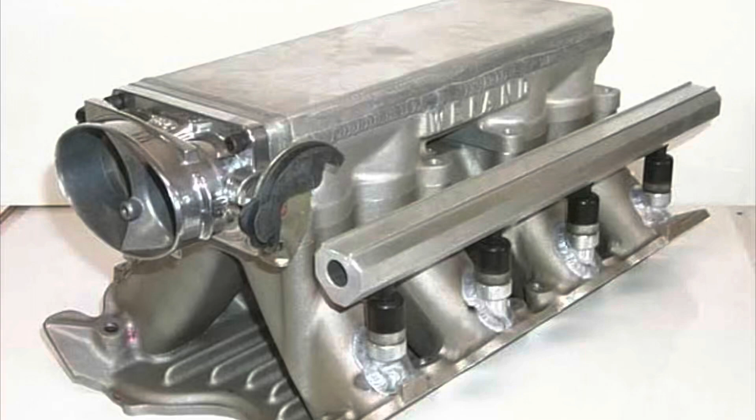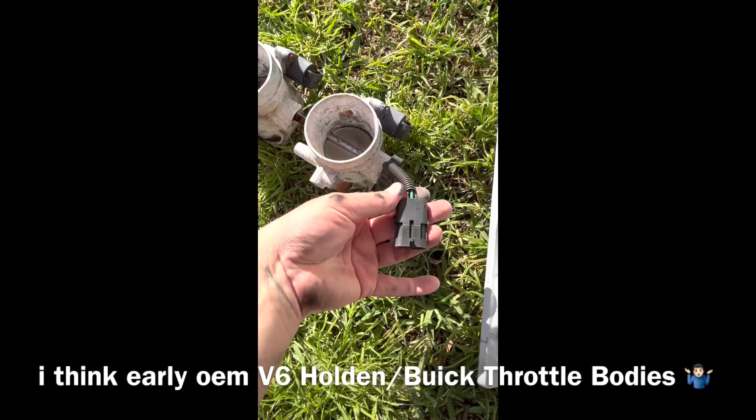Okay, throttle bodies are off and they seem to be welded there at the shaft, so they're interconnected that way, but they're just seized up. That's okay. And I think they're 65mm throttle bodies, and they got one TPS unit, throttle position sensor, right down one of them. That's all you need. This thing.

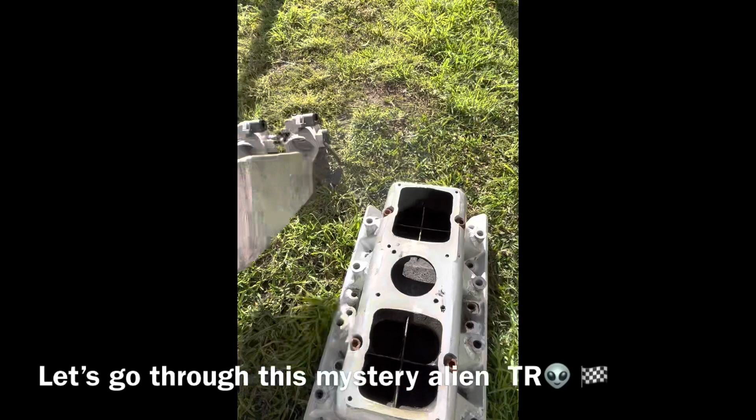Okay. The throttle bodies are now being soaked in fuel and oil. Not that I care about them, but you know, we'll just see if I can free them up. Okay, let's get this top off. A lot of silicone and that on there. All right, ladies and gentlemen, we're down to a twin carb tunnel ram now. All right, let's get this carb adapter off.

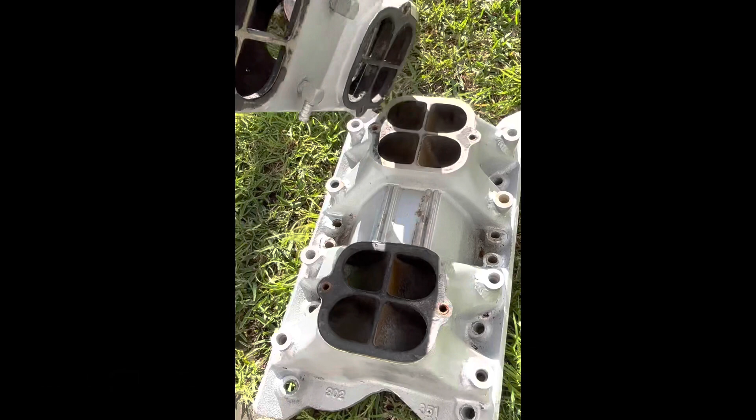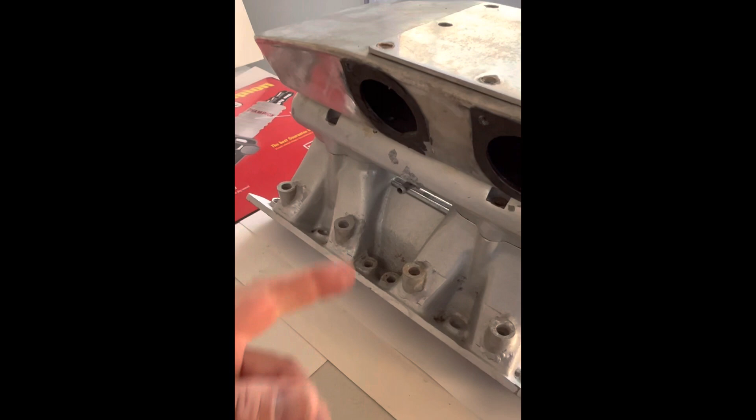All right, okay, let's go ahead and pull this thing down, and I'll give you the rundown and the story with it and what's to go with it. Yeah, anyway, the gentleman I bought this thing off for dirt cheap, I must add, has been involved with Clevelands in his past, both 2V and 4V. He's had some cool things.

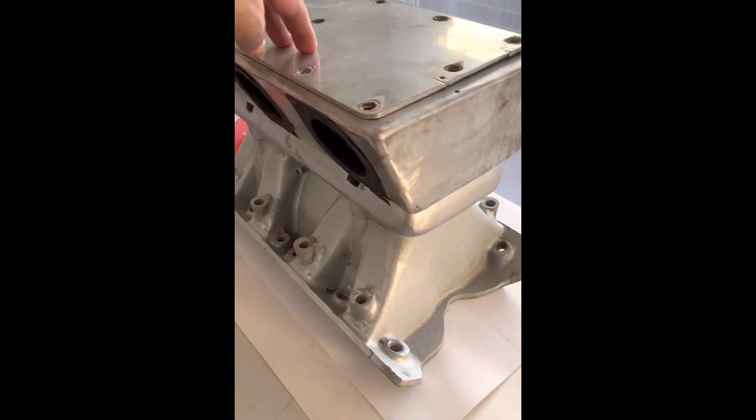And it was actually sitting out in his property, out in the field, and it was actually used as a marker for a mountain bike trail. So yeah, it was sitting out on a log for a while, and it must have toppled over and hit the ground and sat there for a while until he decided to flog some of his Cleveland stuff off and it ended up with me.

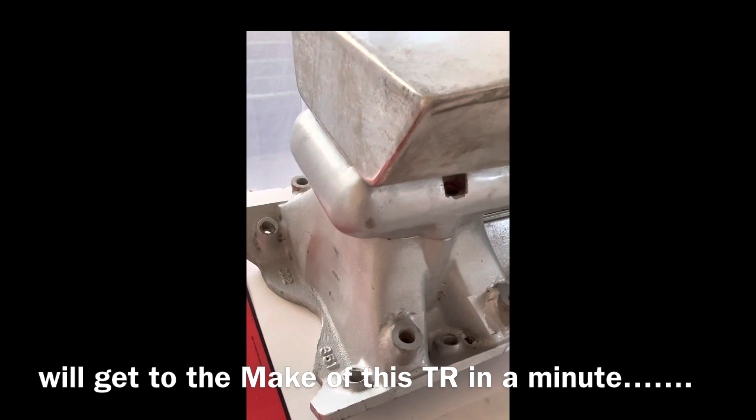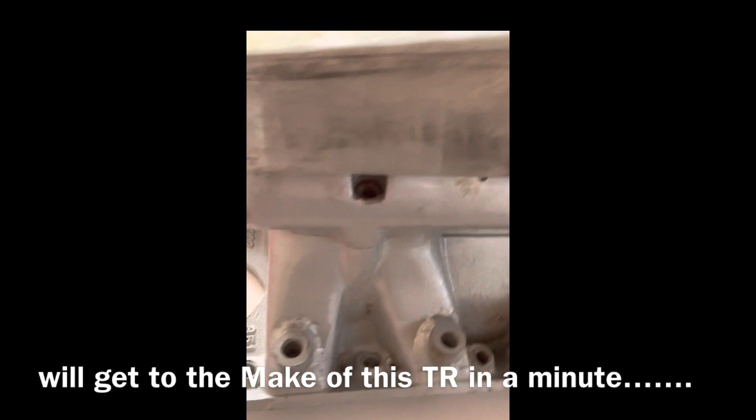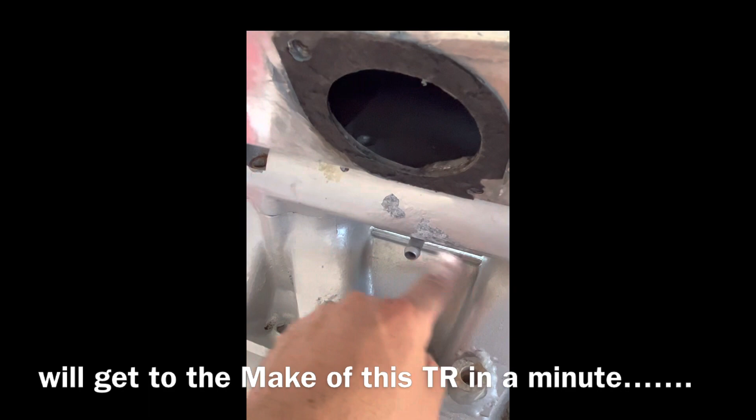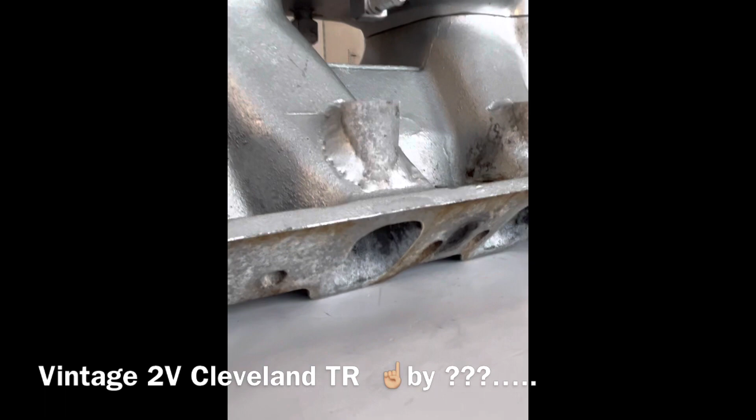Anyway, a couple of you guys guessed sort of what it is, and I'll just go ahead and explain that a little. So first, we've got to look at distinctive features, like that, 351, 302. We've got to look at things like this that's under there. See that finned cast in stripes there. We've got to look at things like that. And obviously the size of the intake ports and runners, and they're not 4V size. So we have a 2V intake manifold here, a 2V tunnel ram.

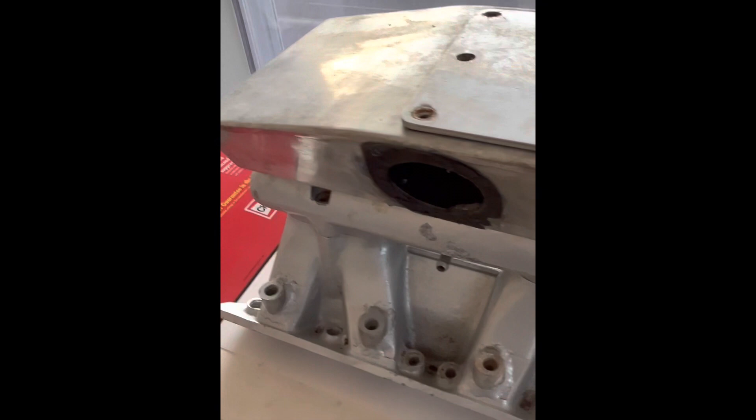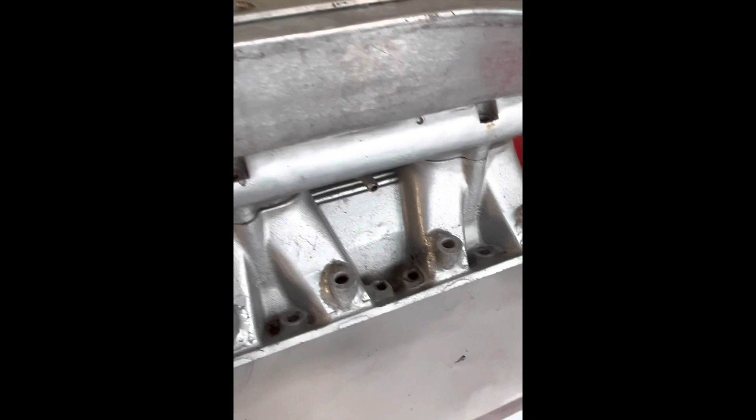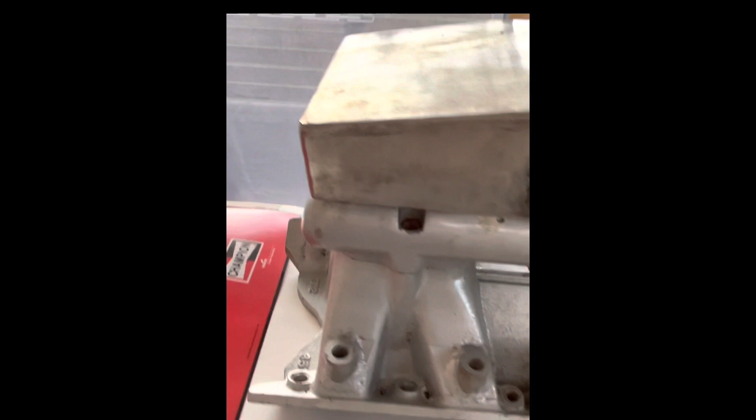It's definitely an interesting piece to look at. It's not the best quality made modifications as far as what I can see, but the guy did convert this over to EFI, and he even had the ECUs and all. So I don't think things were looked at and thought of well when it came to modifying this thing. I purely just wanted it more for the base, and possibly maybe the carb plenum, and that's about it. But yeah, it's interesting, and let's go through what he's done.

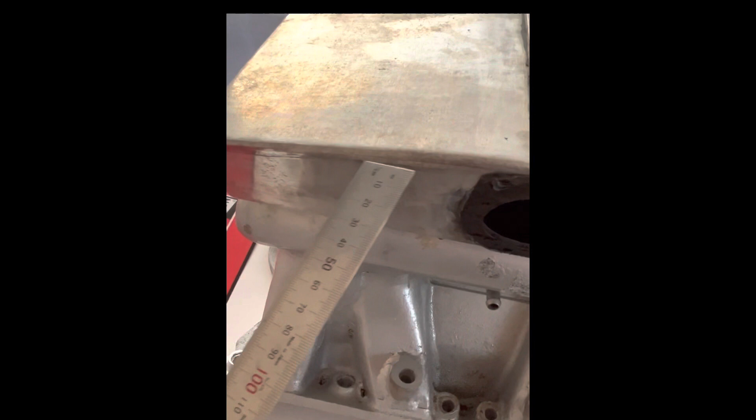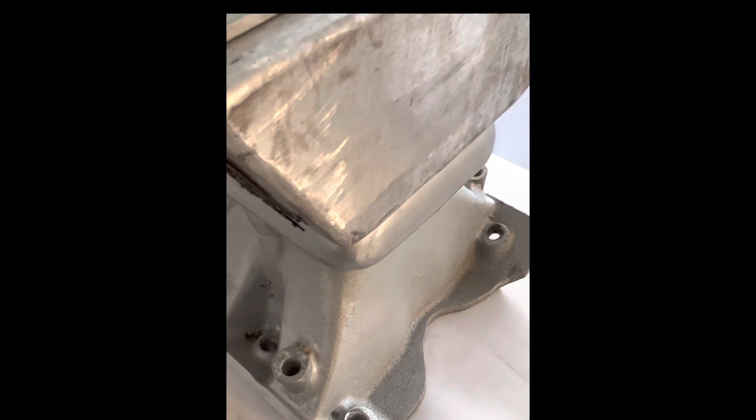He told me his machinist and his aluminium TIG welder carried out all the work, and the injector bosses are all welded in and things like that. Things all got done properly apparently. Everything's straight and welded. So you can see there they've skimmed the outside of the runners first. You can see that little notch, and they've just machined that straight so they can weld these bungs in straight, because obviously the EFI rail is straight and you don't want things veering off and trying to make it up.

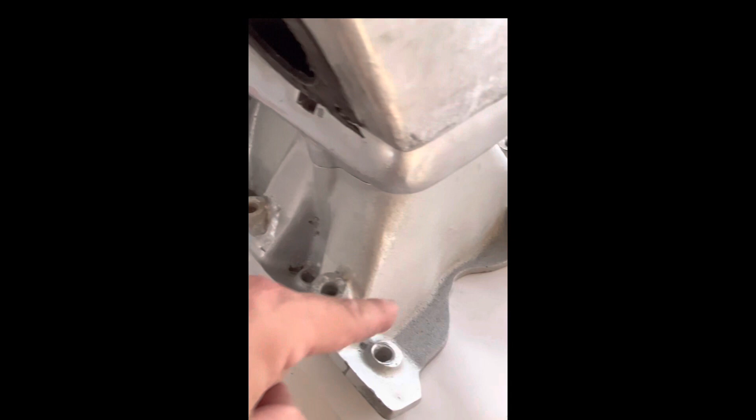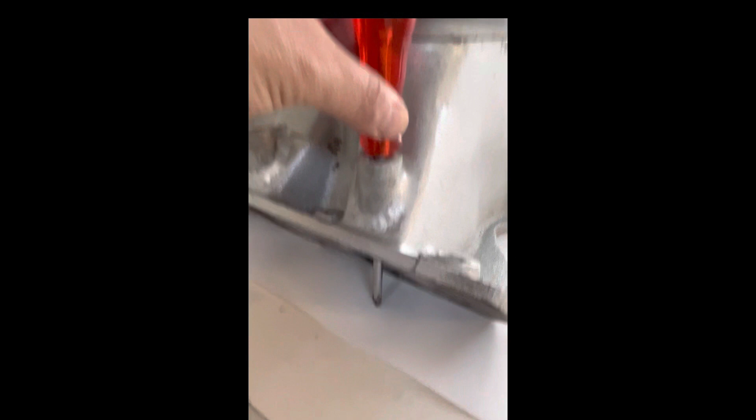Yeah, so after skimming the outside of the runners, they've then gone and drilled directly downwards, not straight across the runner like that, which I think is wrong. So they've done the right thing by just drilling downwards, and that's pretty cool. I'll just show you an example here. You can see that, and that's how the injector would be spraying through the runner.

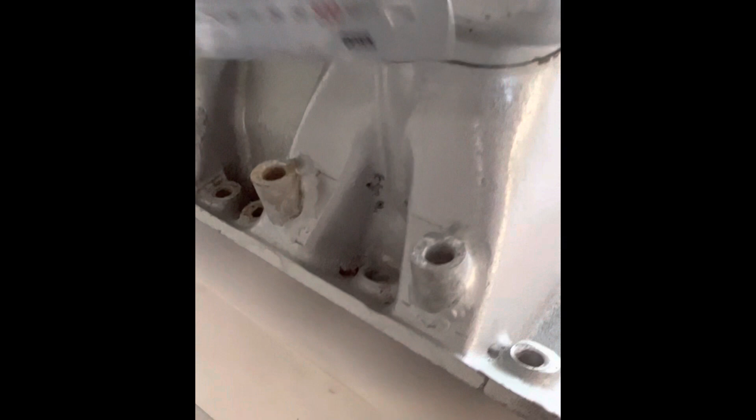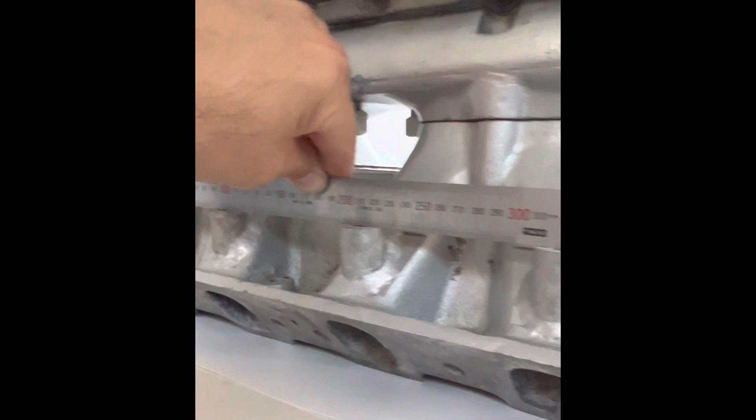And the EFI bungs are welded in true and straight, and as you can see, I've got my straight edge there, and that's just rubbing along all of them nice and fine. There's no gap, so that's pretty cool. That's done properly there. Same on the other side. You run my straight edge along the EFI bungs, and it's laying across all of them. It's perfectly true, which is pretty cool. So that EFI conversion is done right.

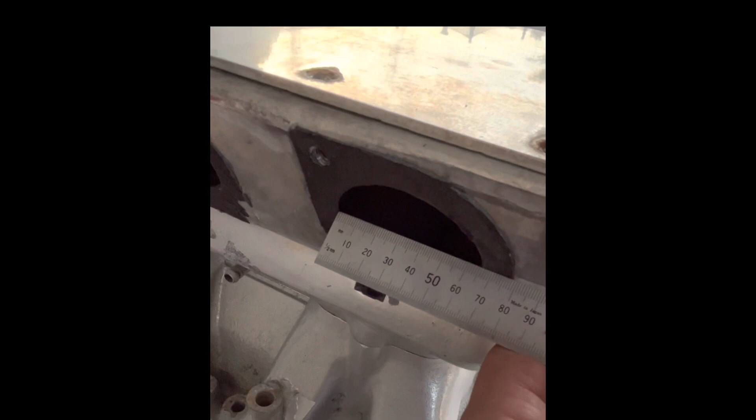Blade size is 65 millimeters. Apparently, what he told me was he ran factory Mitsubishi type injectors. Now, I don't know from what model or anything like that. But yeah, they did get this Cleveland up and running. It was on a set of ported, done up 2V heads, with a mild solid stick.

And they just had issues trying to tune the thing, and apparently his electrician stuffed up a lot of things in the wiring. And it was running all right for a while, but then towards the end, they just aborted this whole thing and just went with a single plane and single carb.

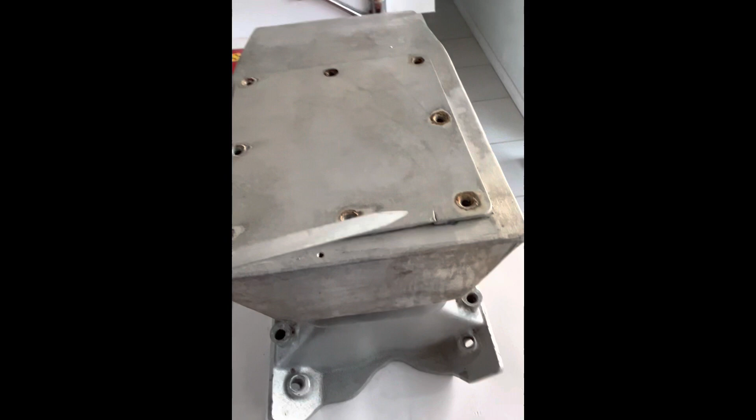All right, let's get this access plate off. That's just all it is. This thing's like a jigsaw puzzle, so you pop this plate off and you get to the other bolts, remove this top plenum, and get to the other bolts, then remove the carb plenum. So yeah, I'll show you guys.

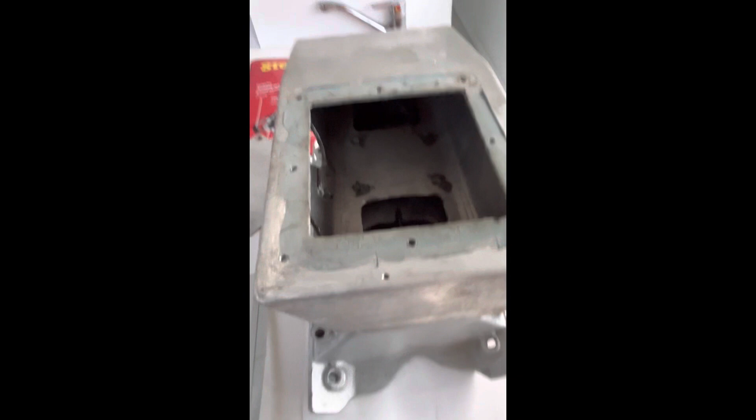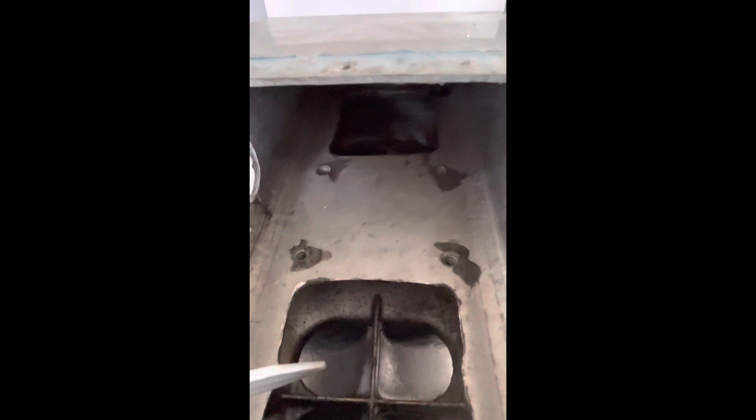All right, it's not the best job. You can tell they've just slapped this thing up and rushed it. It could have been better. Even all the cutouts, they're all just jagged. They're not sharp, but just look at the quality of that. Nothing's match ported with beneath that, which is the original carb plenum. They just had the bolts there with some silicone on top. I don't know what they did that for.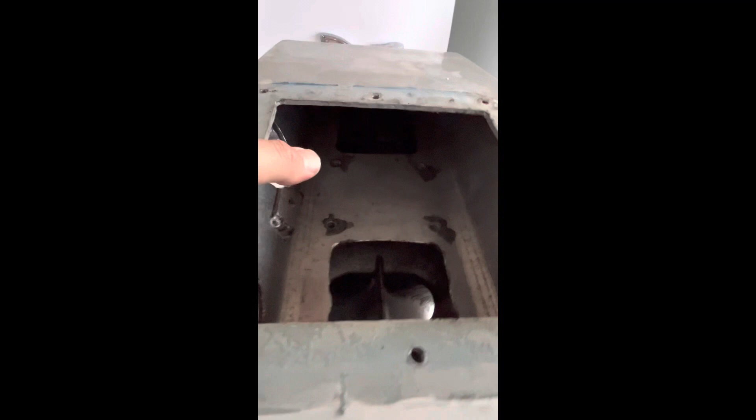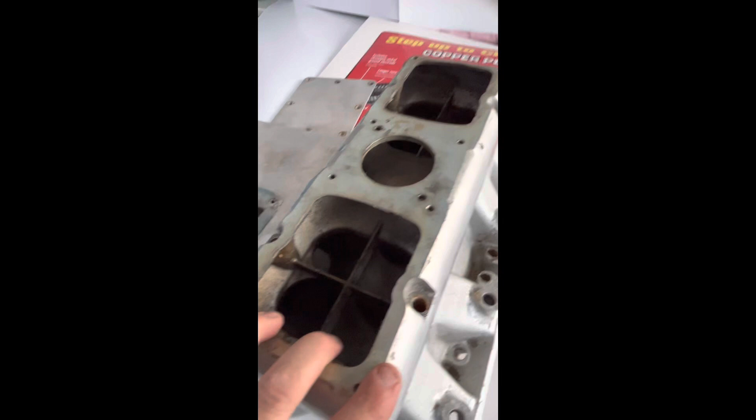Okay, so let's get this tunnel ram plenum off. And there we go, guys. That's the original carb plenum that would have come with this intake. And the carb pads, the risers, they would have been formed in here. They've all been machined off. So they've machined this thing real flat. They've drilled this hole. I don't know why.

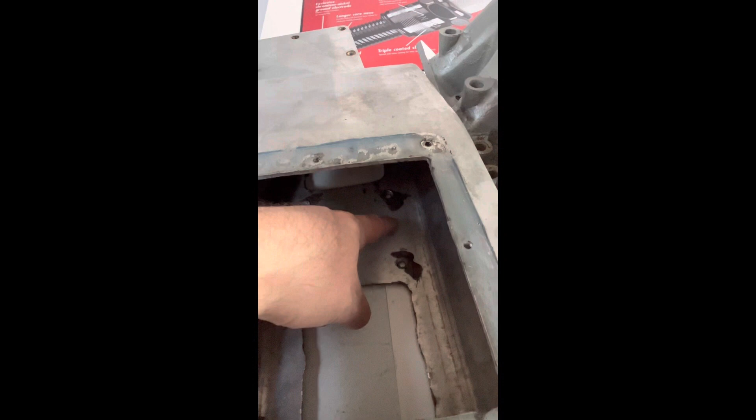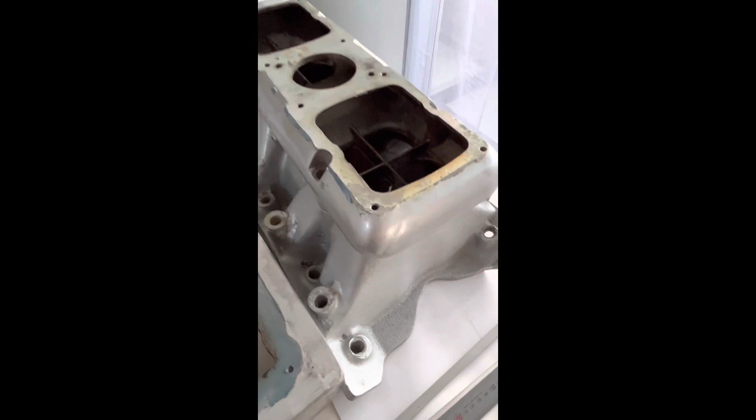I got a feeling that they realised they're doubling up on plenums. So it's entering one plenum, it's going through there, filtering out, you know what I mean? I think this hole here, maybe their plan was to have drilled that out so it's matching, just so they can keep the plenum more as one unit instead of like a double decker, separated thing.

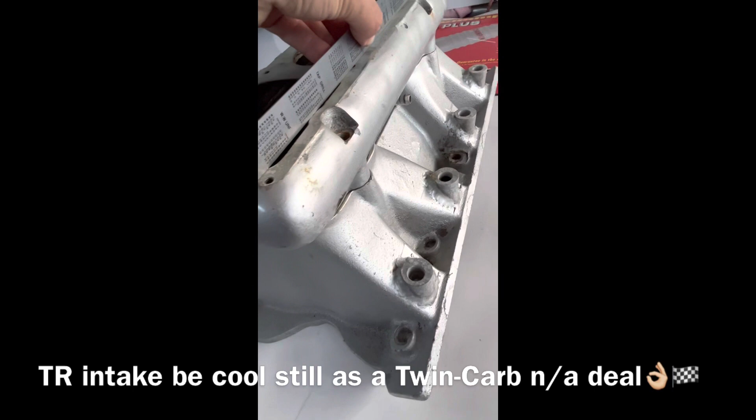There would have been a carb obviously sideways, and they've machined it straight at least, so everything's, I'll just show you this way, everything's machined true. There's no air gaps or anything like that. You can tell it's decked by a qualified person on a machine. Like I said, it's no biggie.

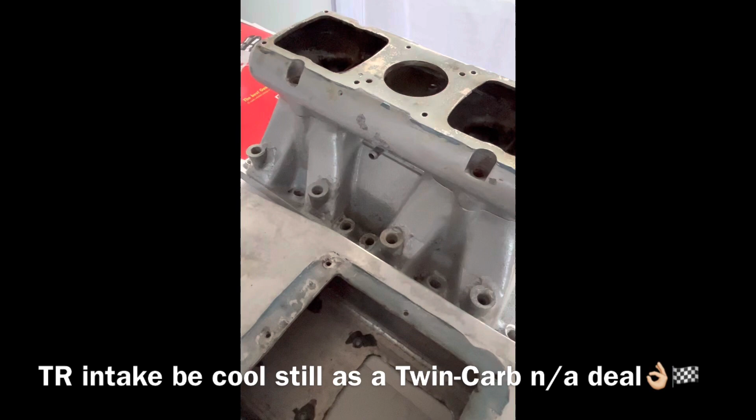Even if you don't want to just run silicone, you can just cut up some gasket paper and make up some type of spacer or a heat insulator. You'll lay that down first just to seal up all this and tidy up whatever they've cut around here. Then you'll just run a spacer just like that example there, and then put your carby on top. It's not too bad. That carb plenum can be sorted out and fixed. That's okay.

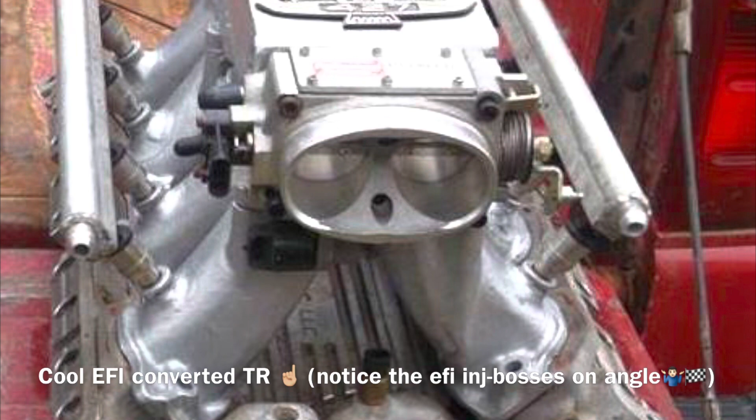Down holes. So I'm yet to mock this thing up. I'm going to take it over to my Cleveland that's on the stand still, and just see how it lines up and how it sits in the valley and stuff like that. But the guy said he had no issues. It laid down all right. There wasn't any issues in that department.

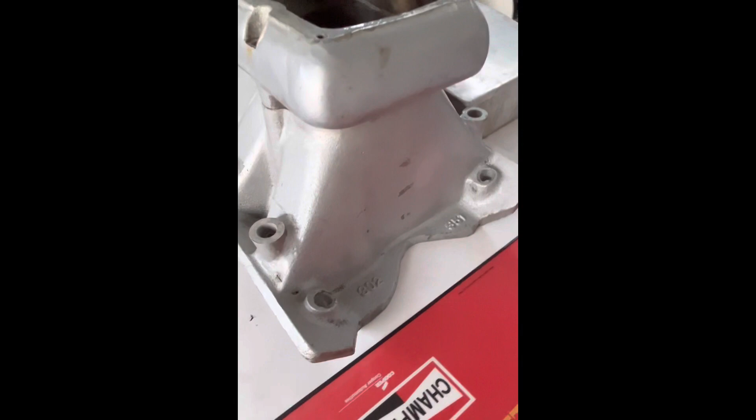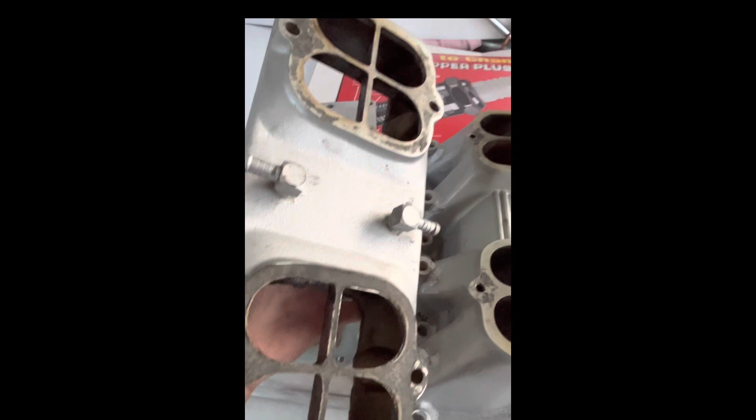Okay, let's get this carb plenum off, and that's just all it is. It hasn't been tampered with. It's all original underneath. It's got 2 vacuum ports coming out of it. They've probably put them in. Let's put that there. And the original make would have been in there.

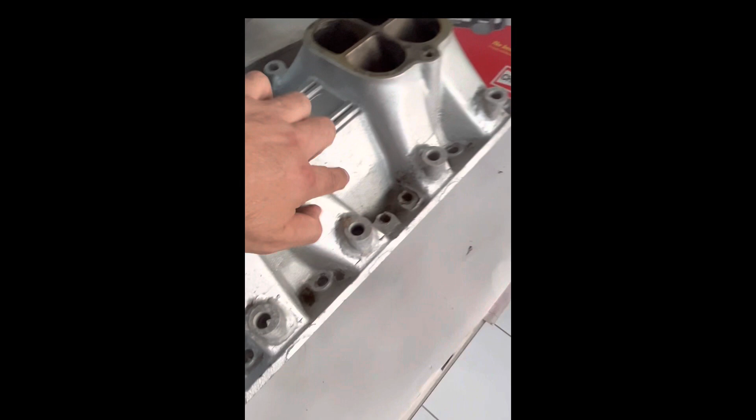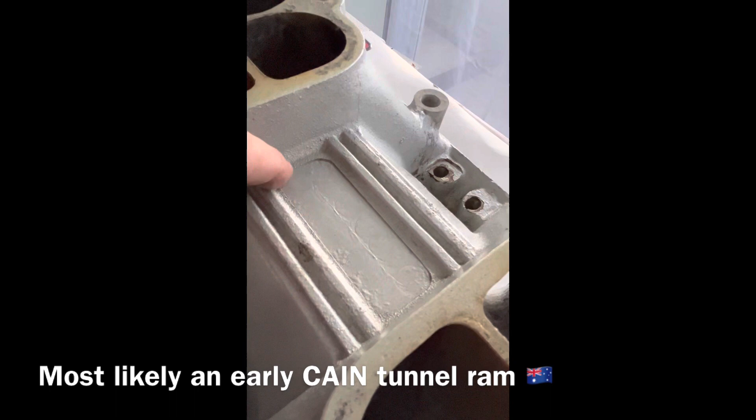And like I said, one of the distinctive features on this intake is these 2 fins that run here, and that's a thing that Cain tunnel rams had on theirs, as well as being an all sealed-in unit like that, and they had the 302 and 351 back here. So they've definitely machined off the Cain logo that would have gone here. You can see machine marks in there. I don't know why, but this is a Cain 2V Cleveland vintage tunnel ram, most likely from the 80s or 90s, possibly even 70s.

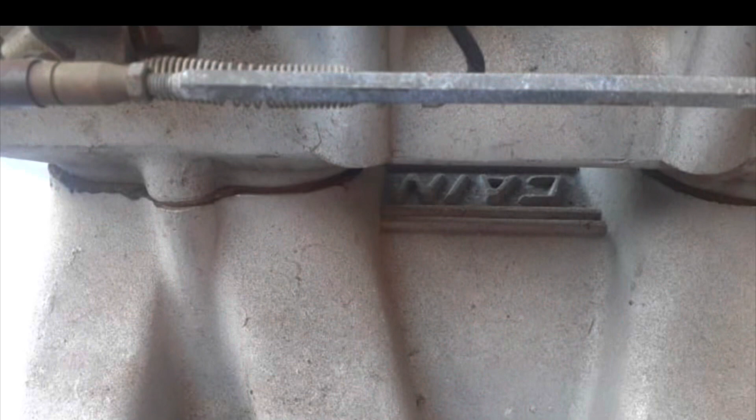The only other possibility I was considering is Redline 2V tunnel ram, but I'm gonna go with that it's a Cain. Redline did do a similar thing like this with similar features, but I'm 99% certain it's a Cain tunnel ram. I was worried a little bit about aluminium corrosion and some pitting, but before he sent it out to me, he had a good look at it, sent me a whole bunch of photos, and I said that's fine, looks good to me.

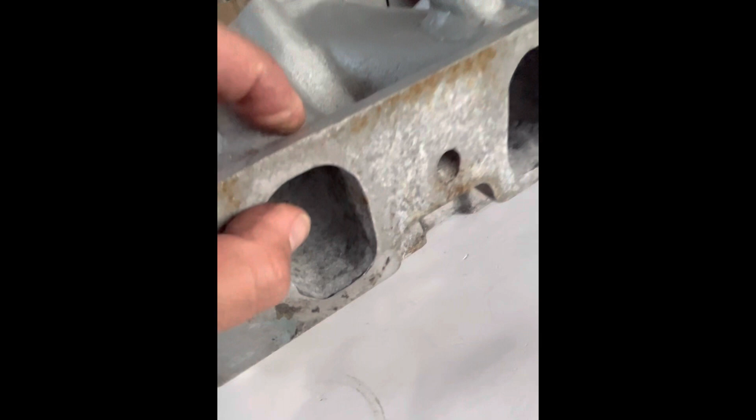The ends there before it meets the head have been ported out just a little, and I got him to measure that before he sent it to me. And the 2V heads, you do need to port them out bigger on the inlets and upon entry, so that's fine. There's probably 1.5 millimeter around the whole perimeter overstock, so that's normal. And I was worried if there was any pitting or anything like that being formed, but that's about it there.

And there's just one more spot, which is that, and that's fine, that hasn't gone through anything, that's just basically on the surface. And I think luckily they had this sprayed, because that's not the original alloy color. This thing's been sprayed in silver, so I think that's helped it, to be honest.

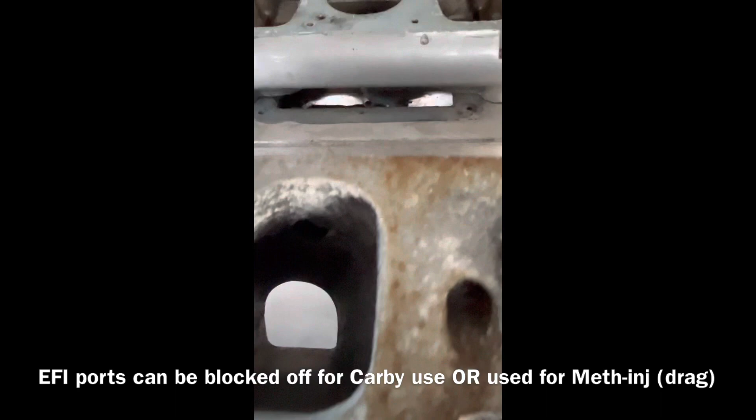Yeah, so that's the underside of it, and that's the injector hole, and it looks like they've drilled the runner maybe twice, or they've misaligned it, but that's fine, because the EFI bung itself and the weld cover everything, so it's no problem. But they could have concentrated a bit better the first time and gotten that right.

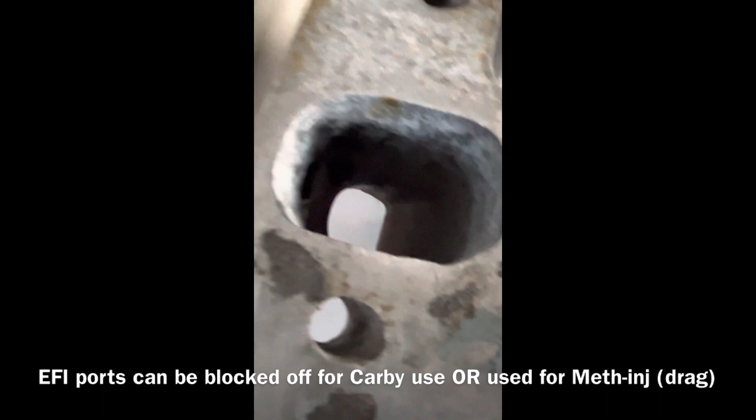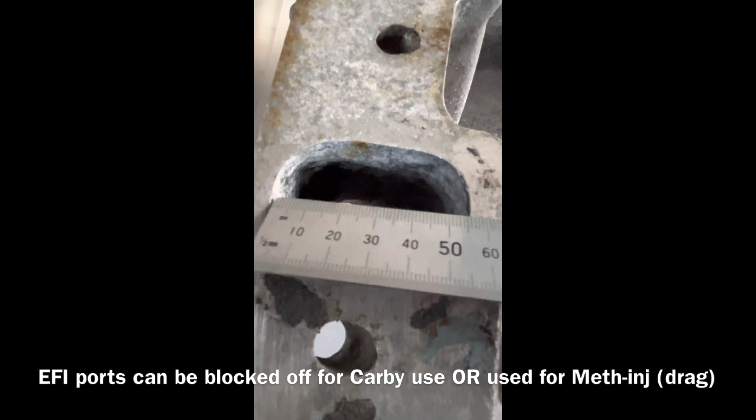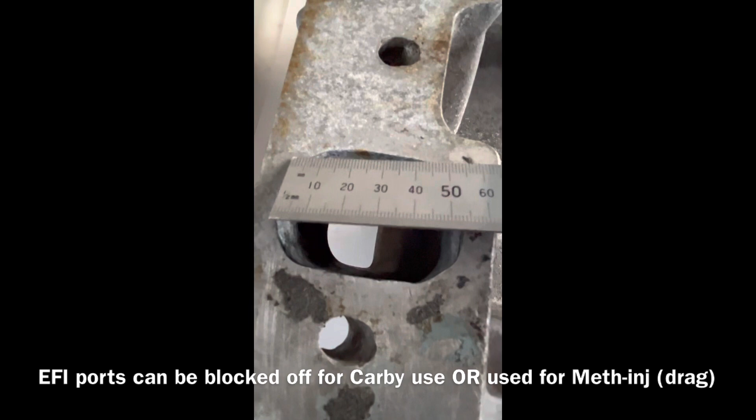Also, if we measure the 2V port on these, like I said, the openings have been flared out a bit, obviously to suit his 2V heads. So even if we find the center there, it's about 56 millimeters. I think the stock head is like 52, so it's probably a 2 millimeter perimeter match port job, which is quite normal on a 2V setup.

And if we go width-wise, roughly it's about 37 and a half. Hang on, let me get that straight. Yeah, and I think stock's about 35, so it's probably got that 1.5 to 2 millimeter perimeter match port, which is normal.

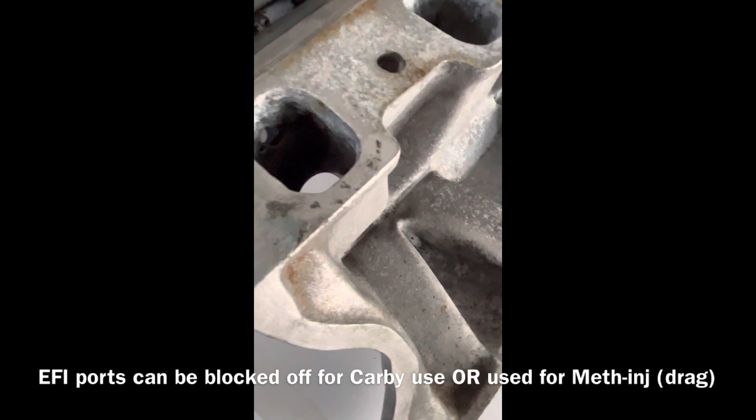Like I said, 2V heads, you do port out the inlets on the factory irons. It's the only way to make them work and make some power with them. You do not leave them stock. It's a bit different with the 4Vs and the 2V stuff. But anyway, it's structurally sound, so there's no problems there.

You can scallop all this out if you want, to look cool, if you want all that stuff to be open there. You can scallop out the front if you want, and the back side, or vice versa. But obviously you'll need to run an oil valley pan then to seal that off.

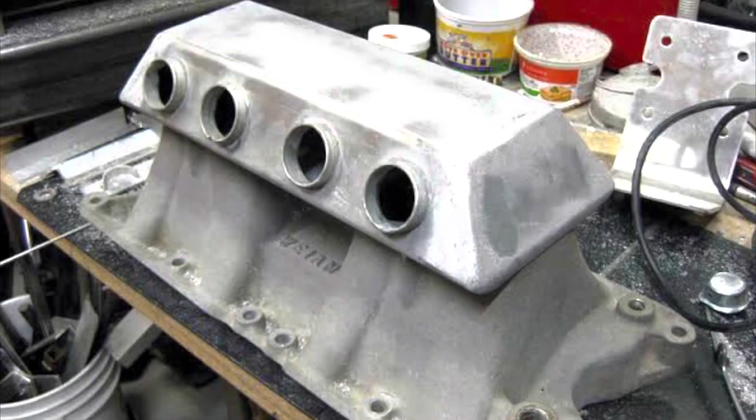But yeah, he still said it was all under bonnet in his Falcon, so that's pretty surprising to me. You would think it'd be sky high, but it's not. Obviously some spacers, carburetors and air cleaners are higher than the whole deal. But what should have been done was, you should have got rid of that if you're going to go EFI, and just do a plenum.

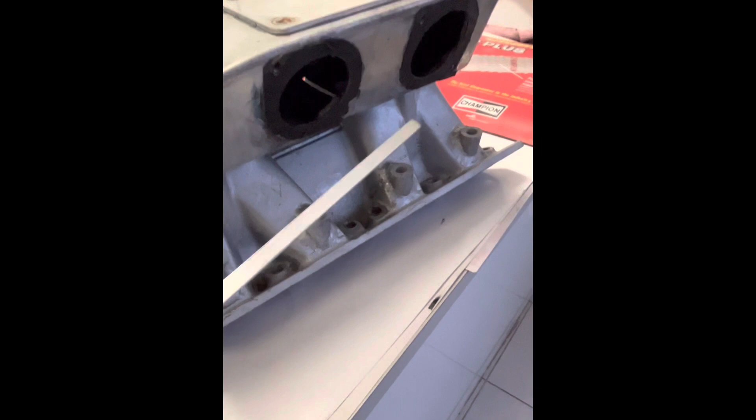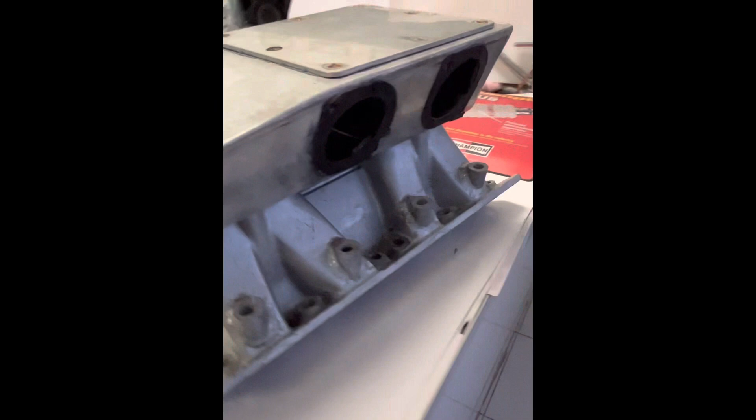You just do a plenum right on top of the entry, the D ports, and that's all you need. You've got your EFI injectors, your fuel rail around here, link them up to the other side, some throttle bodies, and off you go. And it remains even lower and probably will work better. It looks a bit cooler that way. And you don't want two plenums. I think that was a mistake, because they're just trying.

All right, so let's compare it to my badass vintage unmolested dead stock 4V tunnel ram by Weiand, and I've already noticed some differences here just with the port entry design. If you guys have watched my previous vid on this, remember how that has a bit of a wall and a radius turn that somewhat affects flow upon entry here.

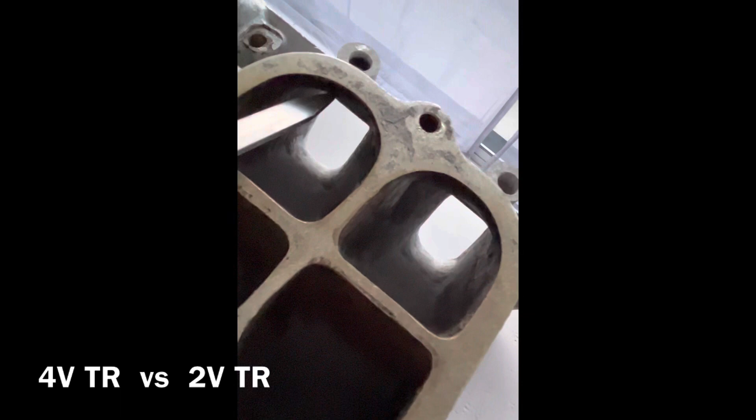And if you look at this one, that, which would be the roof of the head port, is actually straighter. It's a nicer, less radius turn there. So it's more of a straight shot.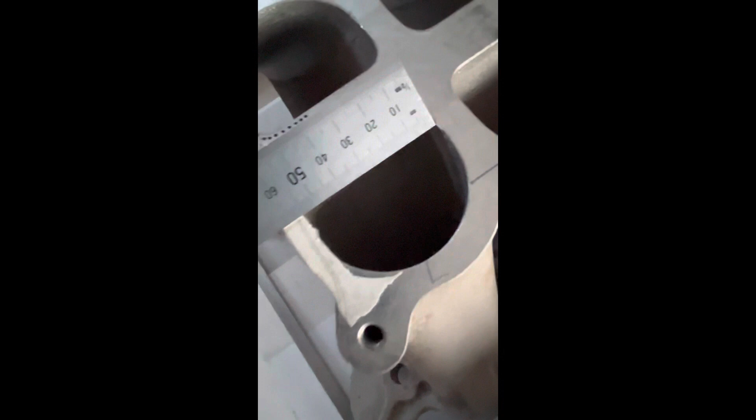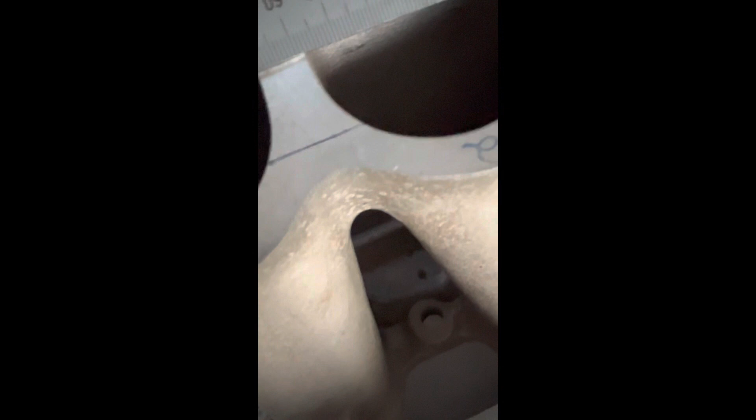We'll come over here to the big boy 4Vs, and we take a look at that width there. It's a good 56, I would say, close to 57 on the width there. Just say it's 57, so it's 7 millimeters wider on the floor, and within the belly there in the middle. And if we go the depth, it's 50, the same.

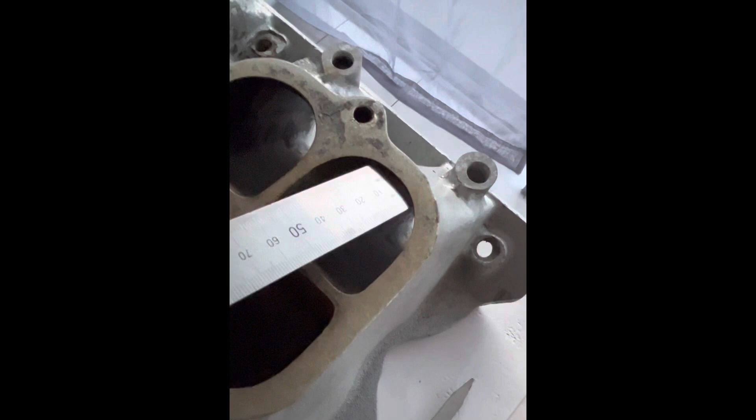Wow. The previous vid, the cross-sectional area within the entry of this 4V port is sort of borderline to the actual exit towards the head port. It has still got more area within here, but if you come over to the 2V, the 2V will be better at it, I'm thinking. So I'm thinking it'll have great cross-sectional area upon entry compared to the actual size of the port where it's exiting. So I reckon that's good.

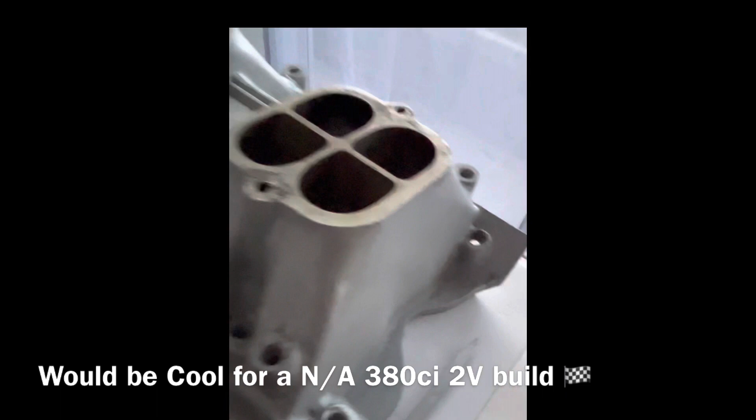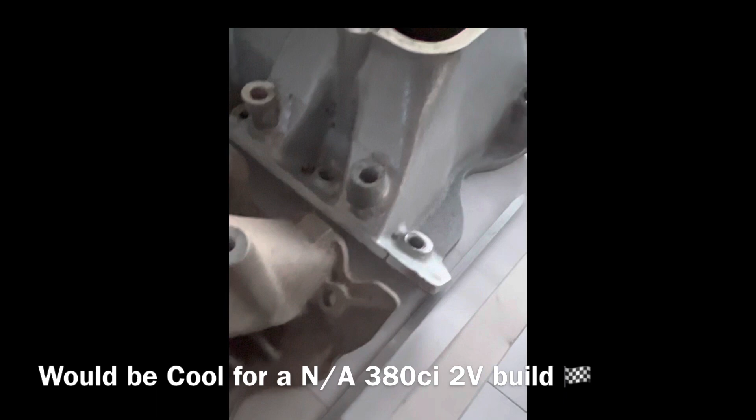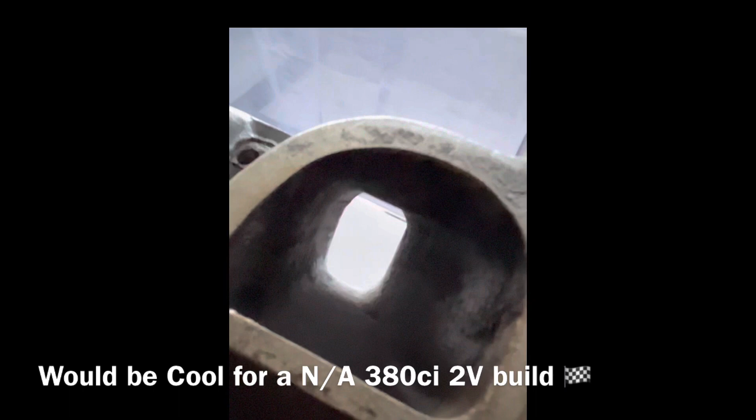That's pretty badass. This 2V intake is slightly higher. And like I said, the actual runners are exactly the same length, ironically, but the height is more, I think, due to that wall being a little bit higher, the side that goes to the roof of the head port. And like I said, that's just got no wall, less radius there compared to the 4V.

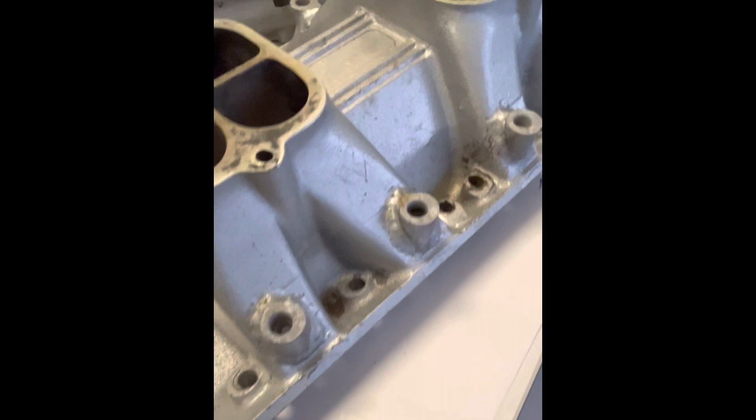Anyway guys, so why am I showing you all this? Well, why not? While I was on the 2V topic, this thing just fell upon me, and for the price that I picked this thing up for, it was $200 posted to my door, which is, say, $135 US landed to your door. And I think that's a bargain, and it's a pretty rare piece because it is a Cane manufactured 2V cast tunnel ram.

And besides that 4V Cleveland build, whenever that happens or gets finished, I did have plans to do another supercharged street combination. Nothing crazy with horsepower, just blower, twin carb on top, more of a street thing. So I have been thinking for a while, I got a couple of virgin blocks at home. I was considering an open chamber iron 2V head just because of the size of the chamber. But then again, those chambers are a little inefficient, so I'm worried about that.

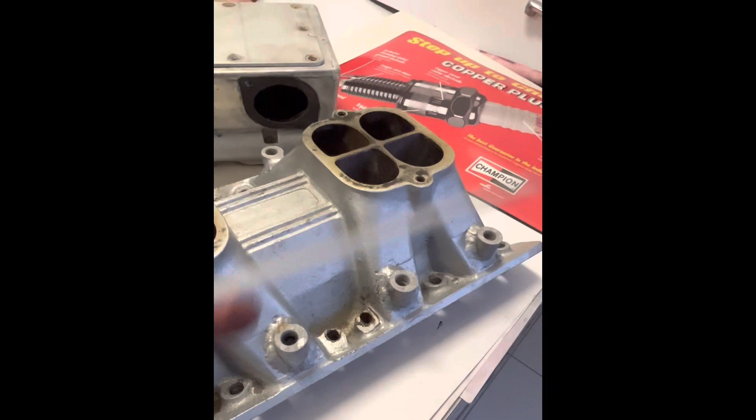As far as how much street boost I can cram in without it pinging and shit like that. But yeah, it was more for the base, and you can create a blower plate on here and get it all welded in, and then get all this ported in, do a pop-off plate underneath, pretty much similar to that rare Boss 302 blower intake video I did a while back. Just the same deal as that. And things will basically cost you nothing, and you can make things happen for dirt cheap.

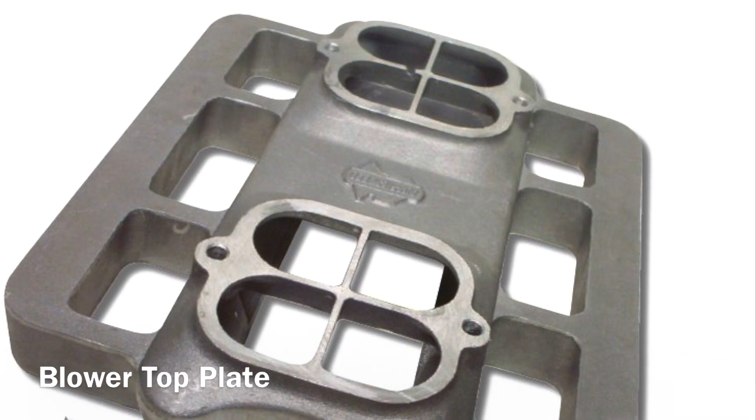Yeah, but we'll see. I'll consider it. If not, I might just offload it. We'll see what happens. But yeah, it's something I thought of down the track. I got a couple of old school blowers at home that I picked up for almost nothing a while back, and I might get them converted over.

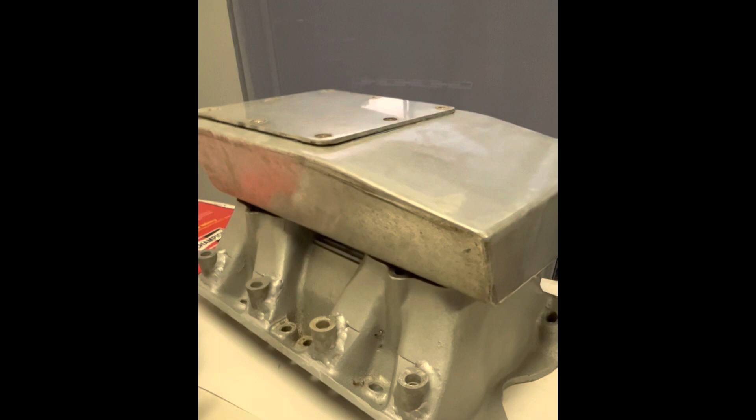And you never know, it might be cool even to keep this all EFI and maybe adapt this plenum on top of the blower with the throttle bodies. And you can always add one more, maybe in that spot there, or just enlarge them and make them into 75 or 80 millimeter twin throttle bodies. I think that's enough. And yeah, that could be cool too, I guess. So do a blower plate, EFI, put that on top with the throttle bodies, and yeah, that'll be sweet.